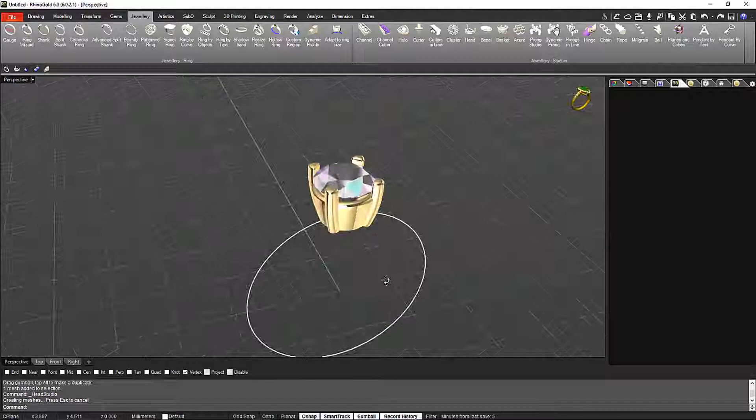Here we have another element into our design. You know that anytime that you want, you can go select and edit any of the parts that we are building up, so you are able to make any change that you want on this design.

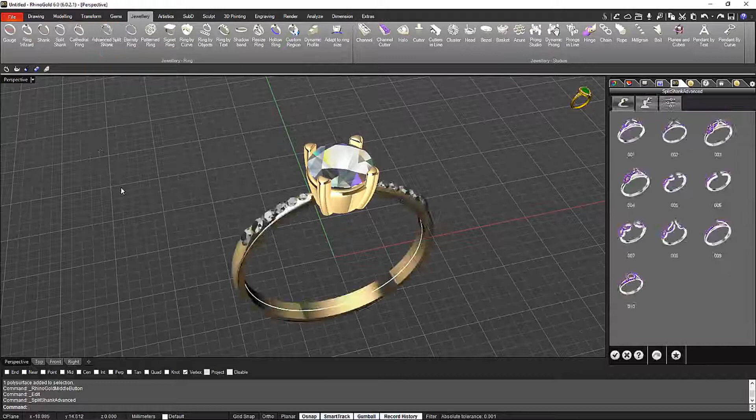Alright, so what I will try to do is a solitaire with the shoulders wrapping this setting. This is the reason that I'm going to choose the advanced split shank. This is a tool that has infinite possibilities.

Have a look at this. So first I will choose that one without stones. Maybe I will use them later on, but to start, the first thing that I need to do is come here.

Because later on I will use symmetry, I just plus opposite symmetry on. And the very important thing of this part is, first I'm going to set up the height. As you can see, you always have the tooltips telling you on which dimensions we are applying the modifications. You see, all the time it's in real time, so 1.9 is okay.

I will do the same on the side profile, 1.9, and on the bottom profile probably I will go a bit less, so just say 1.5.

The width, what I would like to do here is have the same dimensions on the top and side profile, because then probably I will set up stones with this kind of setting that it's called fish tail.

So let's say that we will set stones about 1.5. So I will leave it at 1.6 and 1 - wrong way - and 1.6. And yeah, the bottom is a bit wider.

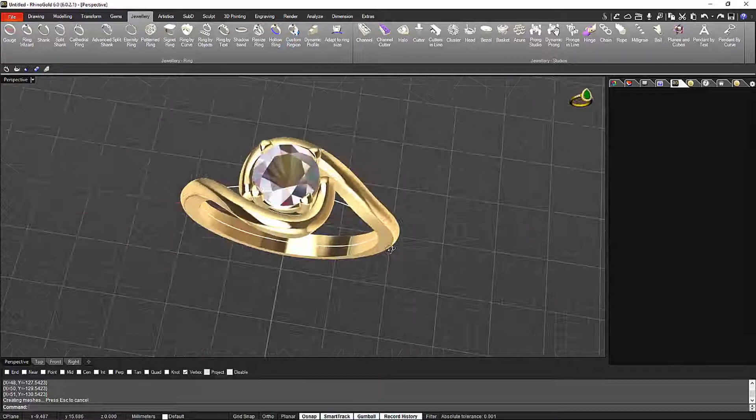Okay, we validate. So we have this ring now. What's the problem here? I want to make a matching wedding band, so I need to follow all this shape around.

There is a very easy way to do that. Modeling, and I go to duplicate the edge. I duplicate this one, and this one. I press enter. Now we have all this edge.

The only thing that I need to do is just go to drawing and join them. Okay, now let's see if we have just one curve. There we go. We have one curve just following all this shape.

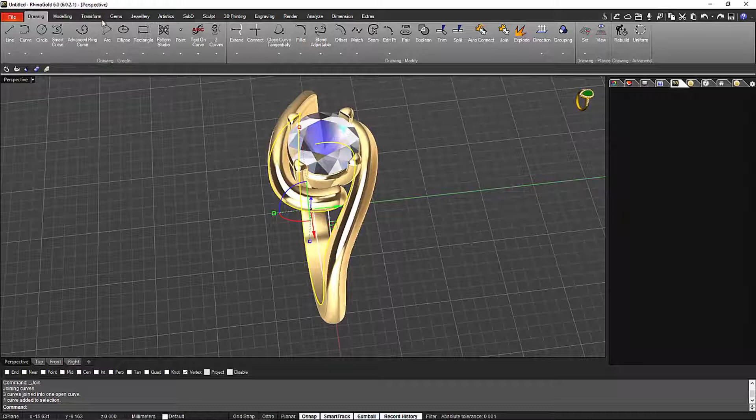What is left? Easy. We have in the jewelry tool our dynamic profile. We have been using this profile many times. As you can see now, it's following just the shape of the ring. The only thing that I need to do is just play on these profiles.

So this is one profile that I have. First thing that I will do is just rotate it to have it straight. There we go.

Now I will set up 1. I will do the same that I had here, that it was about a bit more. There we go. And now I will use the width to set these stones, 1.7. Enter. So we already set up the first profile.

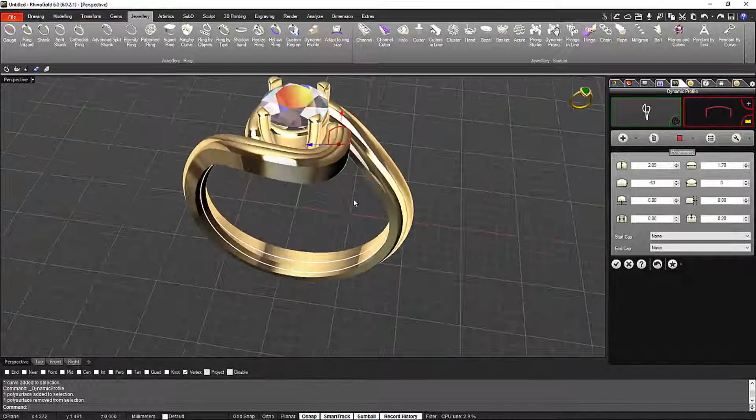We can just move it away from the solitaire. As you can see now, I'm just setting up in which distance do I want it. We will leave it at this distance, and I still can just move the profile, so then I will be able to marry this profile with the one that is coming on the other way.

Alright, so we have this one here. Now I'm going to work on the other side. This is where we have the other side. I will get closer to move it in the right direction.

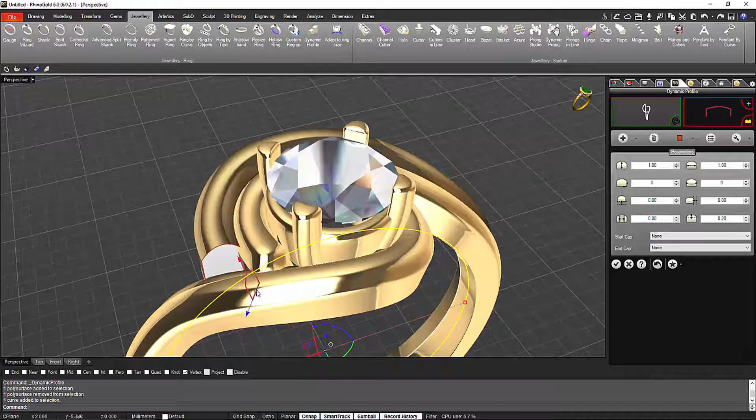So this is where I think it will be the right place. I used the same height, that was 1.7, and a width of 1.7 as well.

Then with the arrow I can just apply any change to be able to match the other side. Alright, so now we are just here, and now I need to move it as I did on the first profile, to move it away from the solitaire. Alright, and I just drop this one.

And now to finish this matching wedding band, as you can see, it's following pretty much exactly what we have. The only thing that I will do is just add another profile at the very bottom, so we can set up the right width and everything on the bottom.

Alright, so now it's straight. I will leave it to the same that I did with the solitaire, 1.5 on the height and 1.7 for the total width.

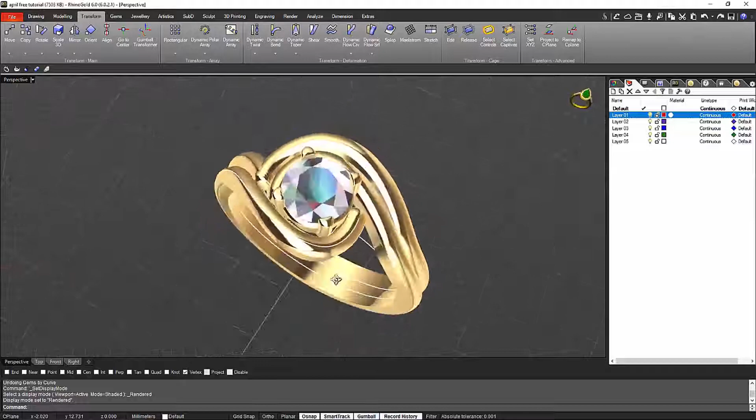Alright, now the ring is ready. As you can see, we have the engagement ring and the matching wedding band. So what will be next will be to look for the isocurve so we can set the stones on this ring.

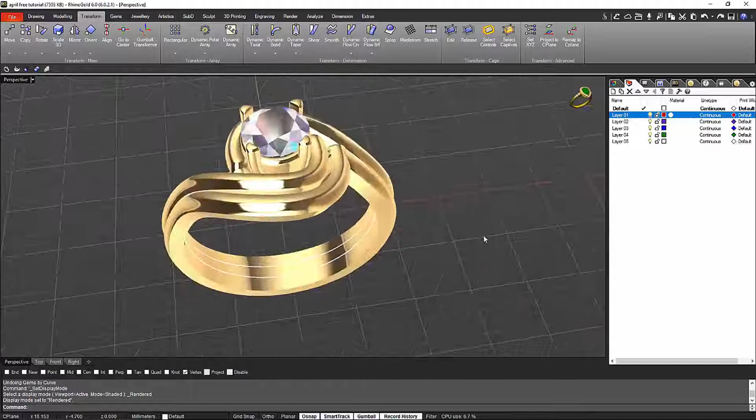Okay, so I have the ring in two different layers, so it's easier to work because I can lock or hide any of the two parts, so it doesn't interfere with what I'm doing.

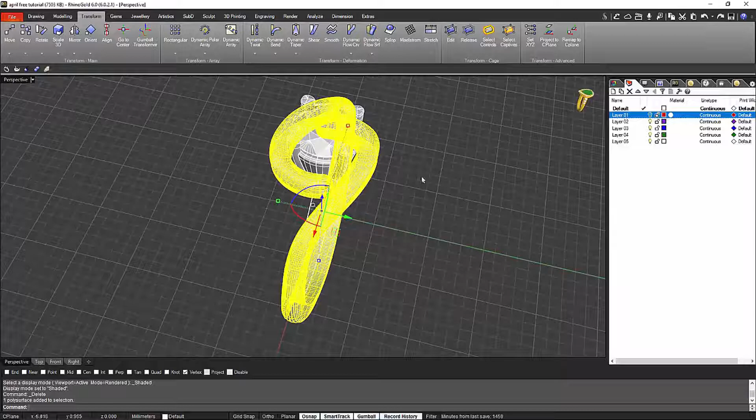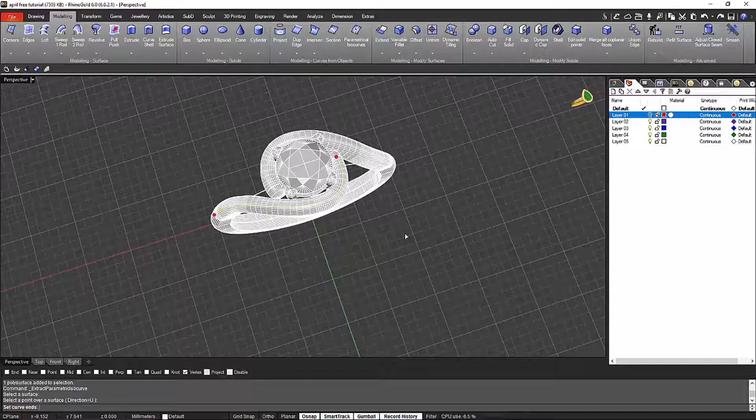From modeling I go to the parametrical isocurve, so I can set the start and the end of this curve. Where the red dots are is where I can set start and end. This is the length that I want. I will do it just on one side, because you can duplicate it or rotate it on the other side, so you don't need to work twice.

Okay, so now I will go for the wedding band. As you can see, I lock the solitaire, so if I click on it, it doesn't do any kind of action.

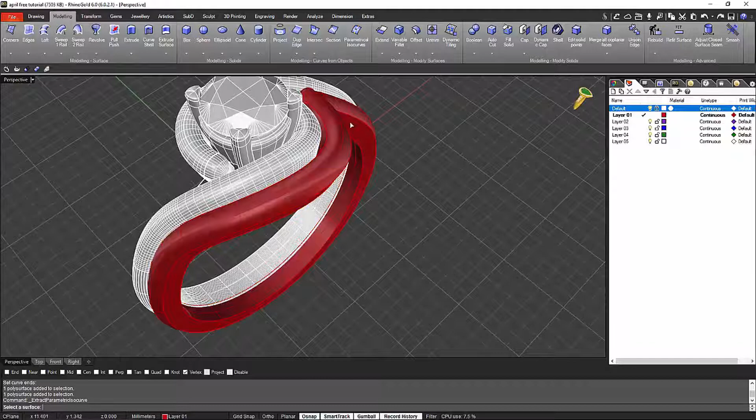Have a look at this line. Do you see this line? This is the line that is placed in the middle. This is the line that we need to look for when we are going for the isocurve. As you can see now, I place it on top, and we have the whole isocurve. I just set up the end to finish at the same level as the engagement ring. This is what makes the ring nicer, to have the stones from the engagement ring and the ones from the eternity ring ending at the same level.

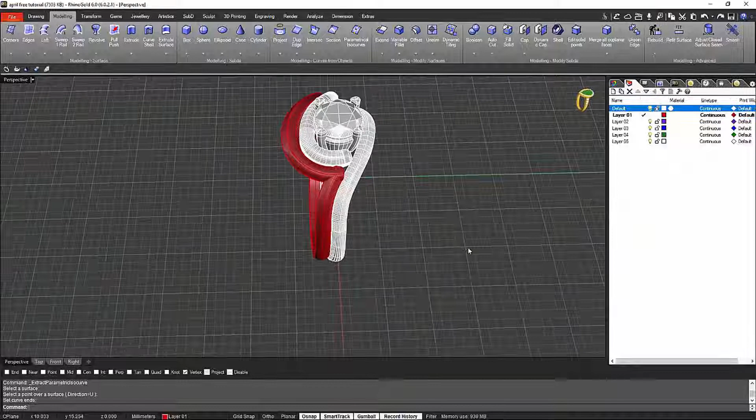I will do the same for the other side. This is the side that I want to work with. I just mark the ISO curve to know where I need to end the matching wedding band. Parametrical ISO curve. I place it in the right place. We have the two dots, and now I just place it, as you can see, at the same level.

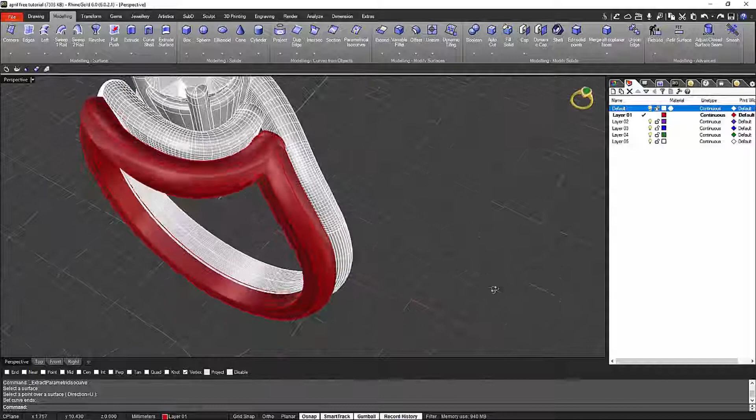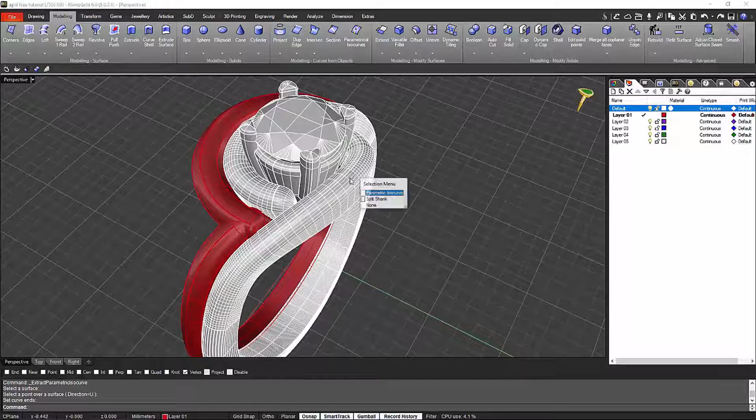Now I select the ISO curve that I have on the solitaire, because now it's time to start placing the stones on this curve. As you know, once we have a curve, the best option is to use the gem by curve. I select the curve, I select the surface where I want to place the stones, so the stones get the right direction.

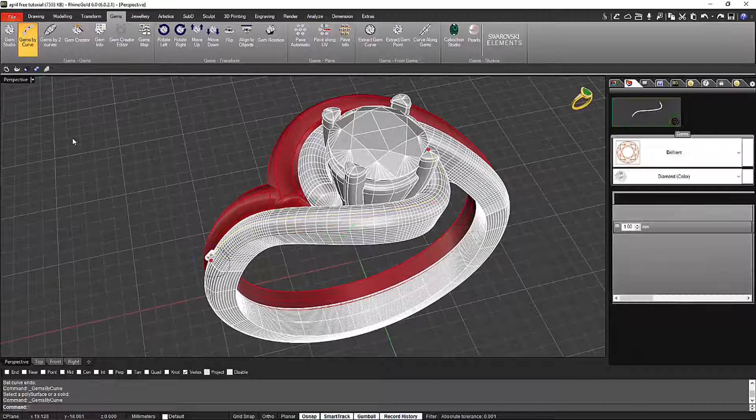Let me do it on the right layer. So let's do it again. Parametrical ISO curve. I select the gems by curve. I place it on the surface where I want to put the stones, so they take the right direction. And now what I will do is just drop this stone a bit inside the ring, because we need to set that stone.

So the way to do it, we go to the second tab and under the surface. Now as you can see, the stone is under the surface. I will go at the first type. I set up the size, 1.3 is okay, and I start to do the duplication till I reach the end that I want to finish these stones.

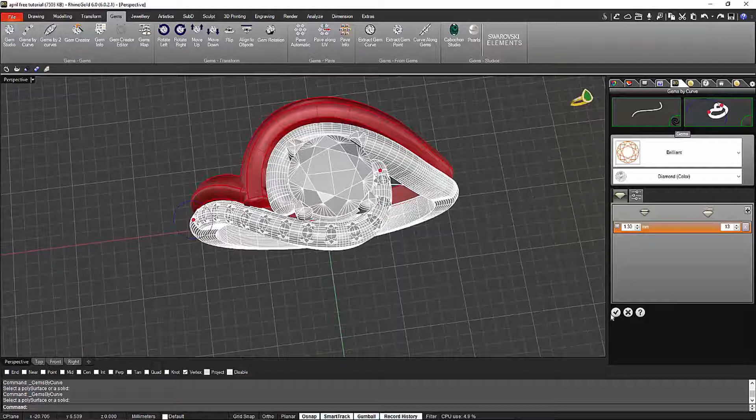Validate. Okay, so as you can see, we are working just on one side, because then we will do the rotation and we will have the stones and the cuts symmetric on the other side. So now I select the stones,

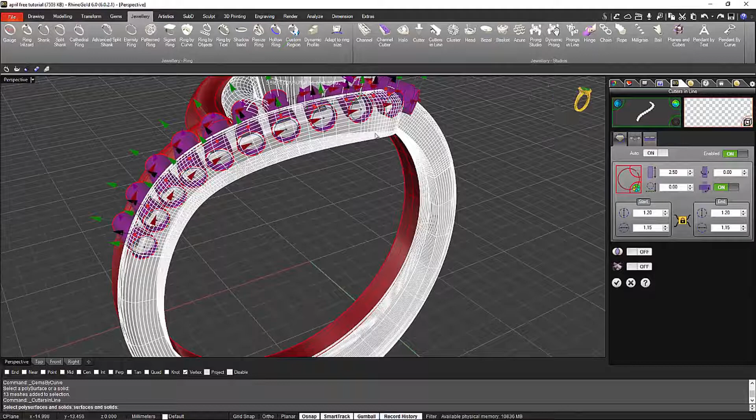and from jewelry I start with the cutters in line. Always the same workflow, this is one of the good things from RhinoGold, you are always following the same workflow. So with the shift key, you know that if I press the shift key, the change that I'm doing in one of these cutters will happen to all of them, as you can see.

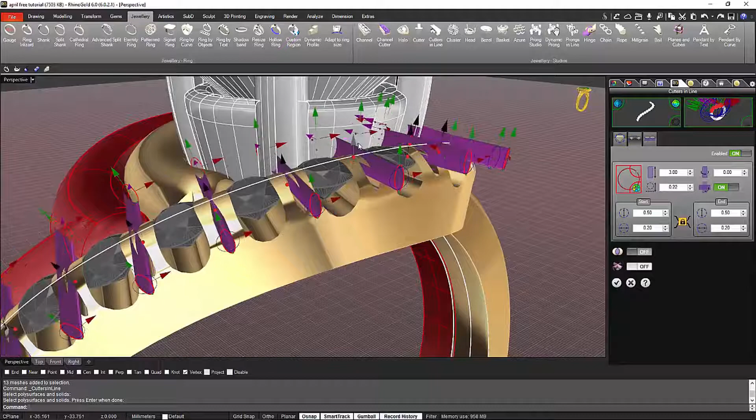I will do the same with the cutters just in the middle, so we have the line where we split the prong to set the stones, and then we will do just the line or the sweep passing through all the stones.

Okay, so we have everything done. This is the part that we will set the stones from, and now what I will do is just do the boolean automatically, and what I will do, because I want to keep one copy to rotate it and do it on the other side, I keep one copy.

I switch the switch to on, and now once I press validate, you will see how I do the boolean on this side, but I still keep a copy. Let me move it so you can see that the boolean is done. As you can see, the boolean is already done here.

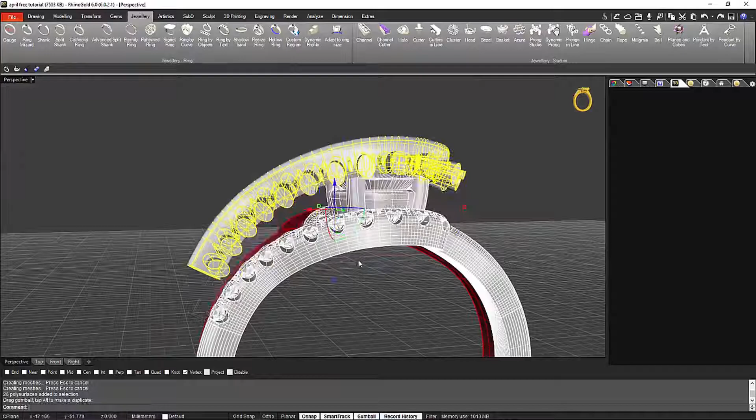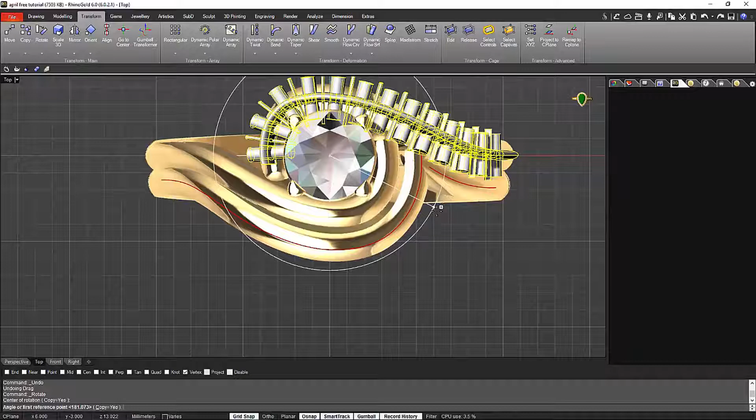And now from the top view I will rotate this on the other side. Rotate. I want a copy, so I keep, but here actually I could put no, I don't want to copy because the boolean is already done, but even though I will do it, and I just rotate it to 180 degrees.

Now we will do the boolean difference with the copy that we did on the other side. Okay, and now what will be left is just do the same with the stones. So we get the stones and we just rotate it on the other side.

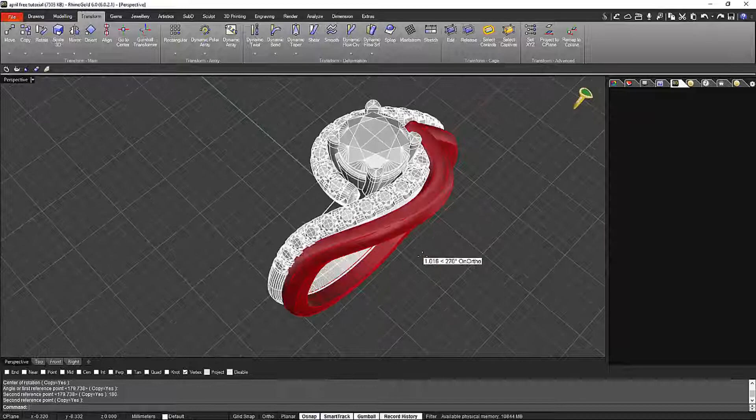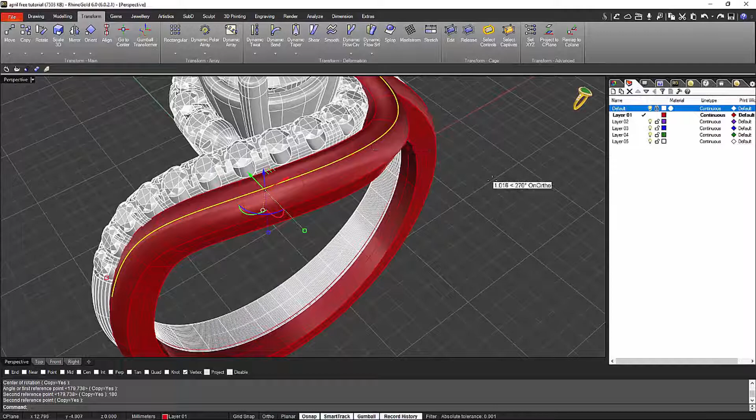Okay, let's do the same now that we have the engagement ring done. Let's do the same to the wedding band. Okay, so I will lock the solitaire layer and I will work just in the layer where we have the wedding band. Alright, so I have the curve ready.

So as you know, the same that we did before, gems by curve, we select the surface where we want to place the stones to get the right direction for the stones under the surface. And now on the first tab, again, we set up the same dimensions for these stones. They are just at the same level, matching the engagement ring, and we start to do the duplication.

Just be sure where you want the stones to be placed. I think that I will probably go for another one. Yes, I think that like this is okay.

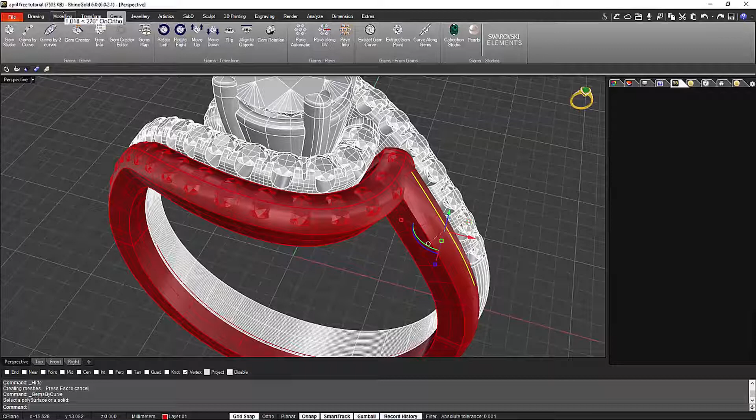Okay, let's do the other side. Again, we select the isocurve, Gems by Curve, we select the part where we want to place the stones, and now on the surface, from here we set up the right dimensions and we start to do the duplication.

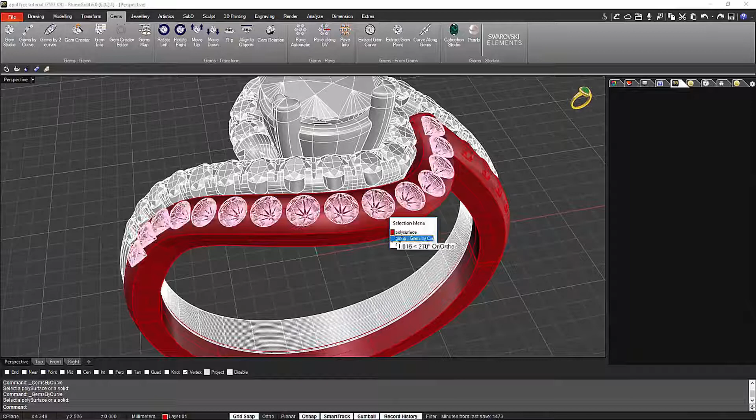Okay, now we move it away because I don't want this stone to be too close to the one from the other side. And as you can see now, we just select the stones and we will do the same that we did with the solitaire. We go to cutters in line and we do the same.

We need to select, as you can see, if I move this and I don't have the surface, I don't see it in real time. Once I select the surface, I see in real time how it looks, the cutters that I'm using.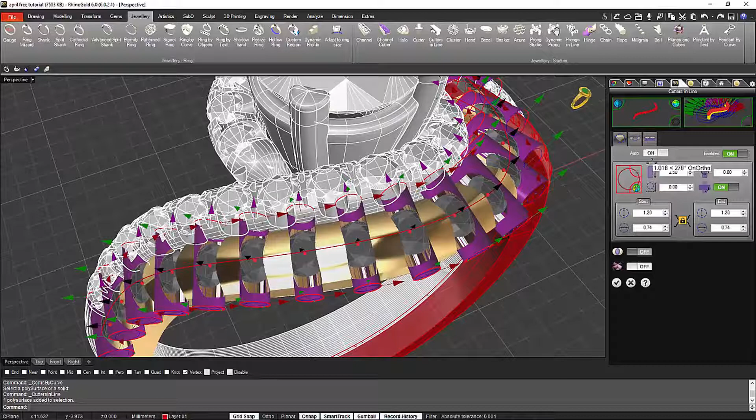So we have the first part done, and now we go to the second tab to make the ones in the middle. We put the switch on. I just raise them a bit, and what will be left is the third tab that I will be setting up the

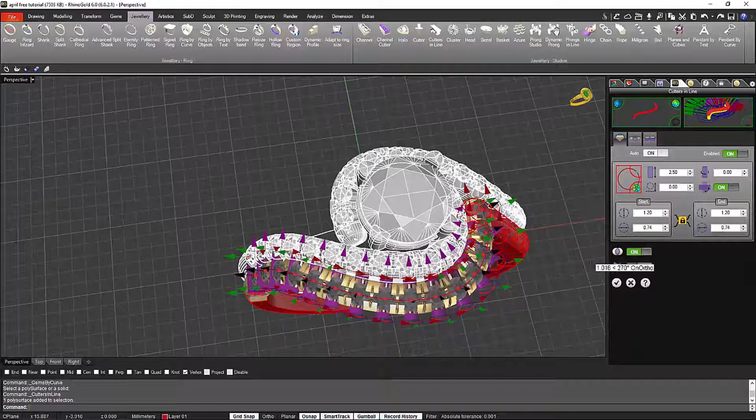Okay, so I will make it shorter because as you can see, if I don't press the shift key, you can act on all these cutters one by one. Okay, so all the ones are how I left them, so I press the Boolean operation. I think that it will be okay like this, and validate.

Look at that, perfect. Let's do the other ones. I select the stones again, gem cutters in line, sorry, select where do I want to place them. So I can see them in real time. Shift key to act on all of them the same.

I do the ones in the middle. I just work on the ones that goes through the stones, as you know, 0.6, as we have done with all the other ones. And perfect. And validate.

Alright, we have it on the both sides now. Now it's time to do the next. That will be to do the mirror on the other side.

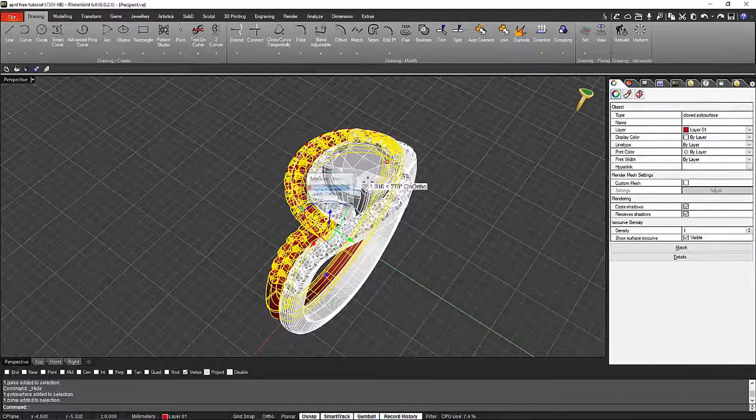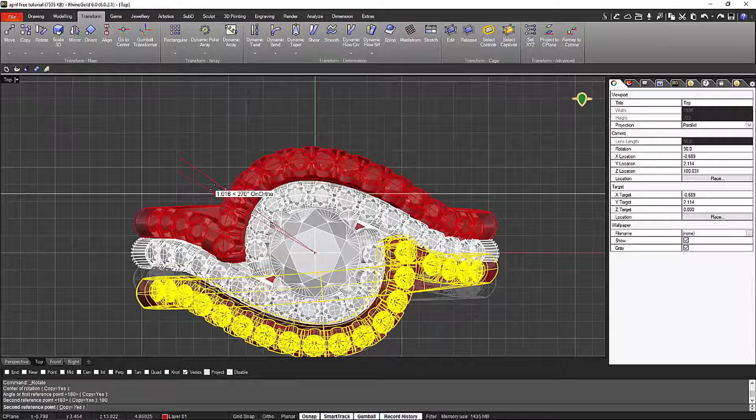So I select all the parts that I want to do the mirror on the other side, so the shank and the stones. You do from the transform tab, rotate from the middle. I set up the angle, and now I just say 180 and the command bar, and there we go. Enter.

And now we have this nice setting. So we have the solitaire with the two wedding bands, so one can be the wedding band and the other one the eternity ring, and we have a very nice set to make the nice render and show it to your customer.